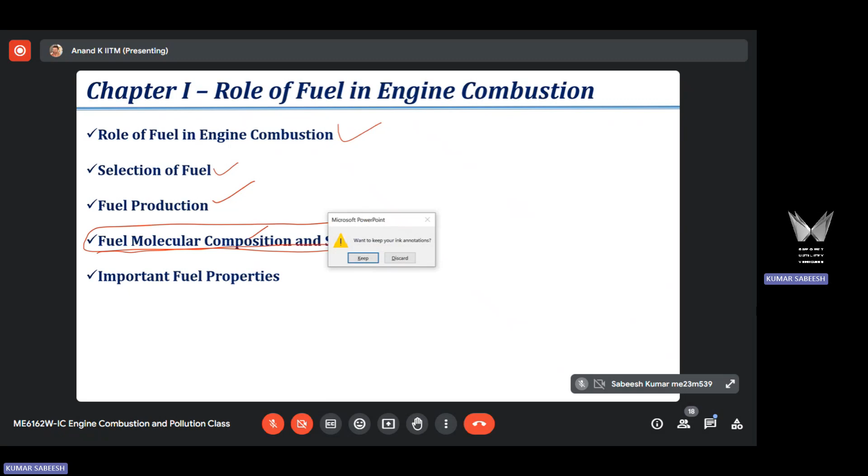So gasoline and diesel are primarily designated as hydrocarbon fuels because the major elements or atoms present in gasoline and diesel composition are carbon and hydrogen. Carbon typically up to 84%. Hydrogen is around 14%. 2% are other trace elements.

Okay, of course, in the current fuel specification, we restrict the sulfur content to a very low value. We call it ultra low sulfur. Sulfur in gasoline is negligible. In diesel, it's relatively high, but nevertheless, we use a very low sulfur content. Apart from that, you may have a little bit of nitrogen and oxygen, right? So those are called trace elements.

So you have some trace elements apart from carbon and hydrogen. Carbon and hydrogen are the major elements present in gasoline and diesel. That's why they are referred to as hydrocarbon fuels. So what we have understood is gasoline and diesel are complex multi-component mixtures of hydrocarbons. Why do I say it's a complex multi-component mixture? Because

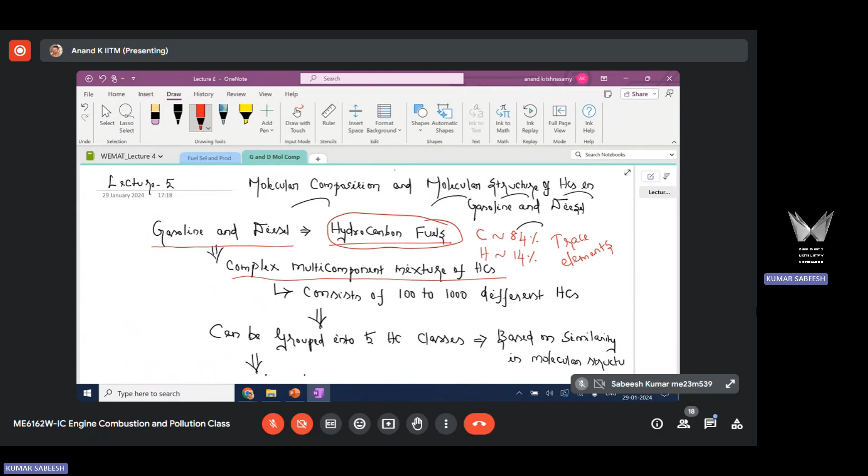from the analytical techniques, in fact, it's not one technique that we can use to identify what is inside gasoline and diesel. We have to use multiple analytical techniques to identify the composition. Although we use these two fuels in our day-to-day life, we never pay attention to their composition, which is very important for understanding the combustion process undergone by these fuels. That's why we are spending time on this.

So as I said, we have to use multiple analytical techniques because the number of hydrocarbons present in gasoline and diesel can vary anywhere between 100 to 1000. You can now imagine the complexity of the fuel. Okay, so why is it given in a range? Why is it not a specific number? What could be the possible reason?

Molecular bond, sir. What is that molecular bond? What I mean to say is like ethanol is there, then C2H5, then benzene can be C6H6 like that. No. My question is not about molecular structure. My question is why it is given in a range. Why is it not a fixed number?

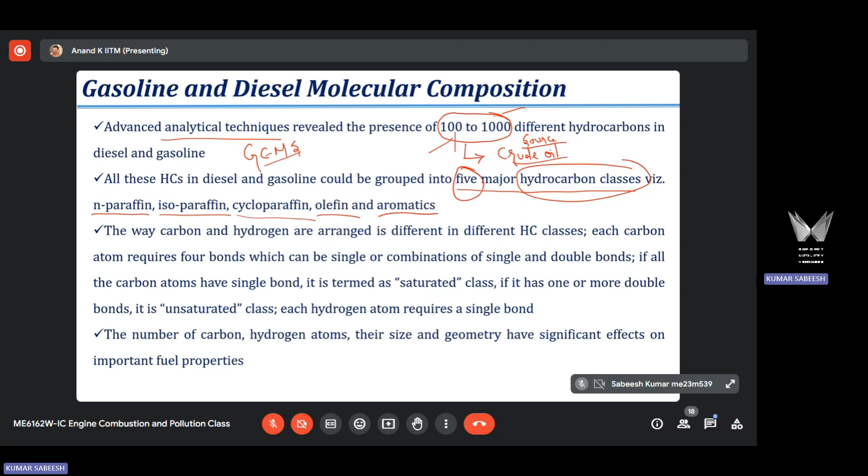What are those 5 hydrocarbon classes? Normal paraffin, isoparaffin, cycloparaffin, olefin, and aromatics. These 5 are called hydrocarbon classes. So you can group these 1000 hydrocarbons into 5 classes as indicated here, and this grouping is done based on similarity in the molecular structure.

This is very fortunate because what I will do is, when I want to simulate the combustion process with gasoline or diesel, I will consider only these 5 classes. I will take 1 or 2 representative hydrocarbons for each class and then carry out the simulation. That is how the combustion simulation is being carried out now.

You may be surprised to know that most of the time we use only 1 hydrocarbon to mimic or capture the characteristics of 1000 hydrocarbons. It is a surprising thing, right? But that is a very simplified assumption. You have to go for more than 1 hydrocarbon, but you have to carefully choose those hydrocarbons, because with those very few hydrocarbons, you have to capture the characteristics of 1000 hydrocarbons. So it is a challenge, right?

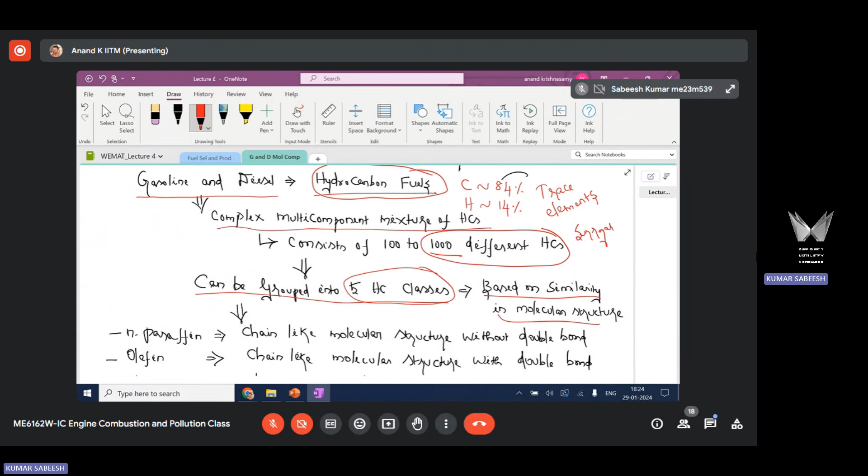How many and what kind of hydrocarbons you choose to carry out your combustion simulation is an area by itself. It's a challenging task. This approach is called the surrogate modeling approach. That is the approach currently used to carry out combustion simulation of SI engines and CI engines with gasoline or diesel. A surrogate is a representative hydrocarbon. We use only very few. The most simplified case is you use only 1 hydrocarbon to capture the characteristics of 1000 hydrocarbons. This is an important point to note down.

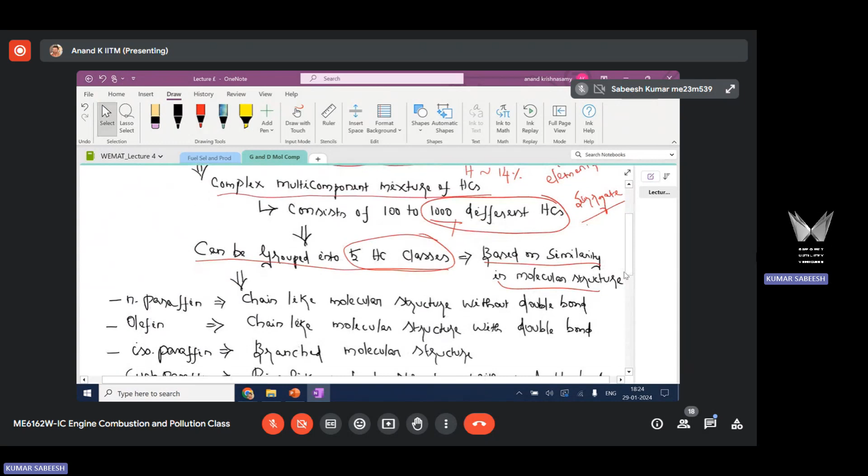As I said, these 1000 are grouped into 5 based on this consideration. They have only 5 different molecular structures. What are they? Normal paraffin, which has a chain-like molecular structure without any double bond. Then you have the olefin class. Again, it is a chain-like structure, but here you have a double bond present in the molecular structure.

You have isoparaffin. In this case, you have a branched molecular structure, not a chain. Then you have cycloparaffin. It is a ring-like molecular structure, without double bond. Then you have aromatics, a ring-like structure with double bond. So all these are hydrocarbons. I will show the typical molecular structure of these 5 classes.

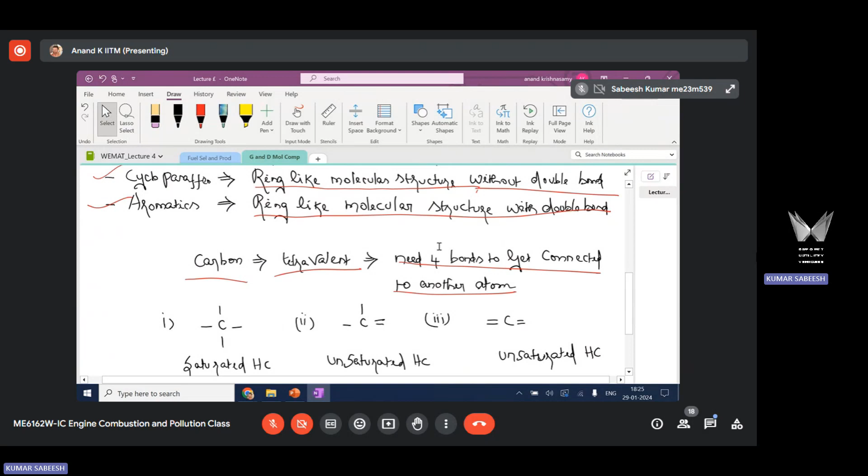But before that, take a note that from the perspective of connecting carbon and hydrogen, carbon is tetravalent, meaning it needs 4 bonds to get connected to another carbon atom or hydrogen atom. I have shown 3 possible cases here. Case 1, all 4 are single bonds. Case 2, you have 2 single bonds and 1 double bond. Case 3, you have 2 double bonds. So tetravalency is satisfied in all 3 cases.

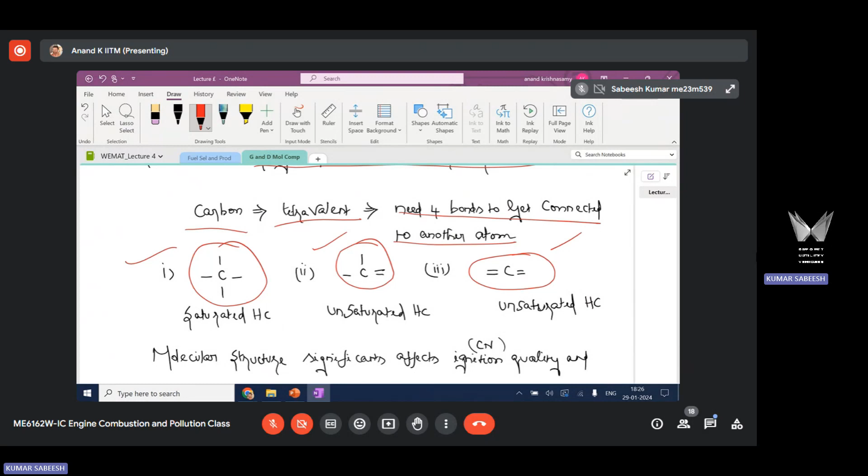But in case 1, you have only single bonds. Case 2, you have a double bond and 2 single bonds. Case 3, you have 2 double bonds. Whenever you have a double bond, it is said to be an unsaturated hydrocarbon. These 2 are unsaturated hydrocarbons. Whenever you have all single bonds, it is said to be a saturated hydrocarbon. This is very important to know. There is a bit of chemistry involved here.

This is important because how carbon and hydrogen are connected in a hydrocarbon fuel carries a lot of significance, because the energy you need to form a radical from a single bond is different from the energy needed for a double bond. Earlier we discussed radical formation. Fuel possesses chemical energy in the form of enthalpy of formation. To initiate SI engine combustion, we discharge an electric spark. The spark discharge provides thermal energy or activation energy to form radicals.

In a diesel engine, you are compressing air to a high pressure and later injecting fuel. This compressed air provides activation energy to break the fuel molecule and form radicals. Once the radicals are formed, the combustion event gets started. And I already told you that combustion is a self-sustaining event. It will go on its own as long as sufficient radicals are available. You just have to initiate it.

To start the combustion event, you provide spark discharge in an SI engine. In a diesel engine, you compress to high pressure and high temperature. This helps initiate radical formation. Once the radicals are formed, the reaction goes on its own. As long as sufficient radicals are available, the combustion event will continue and thermal energy release will continue to happen.

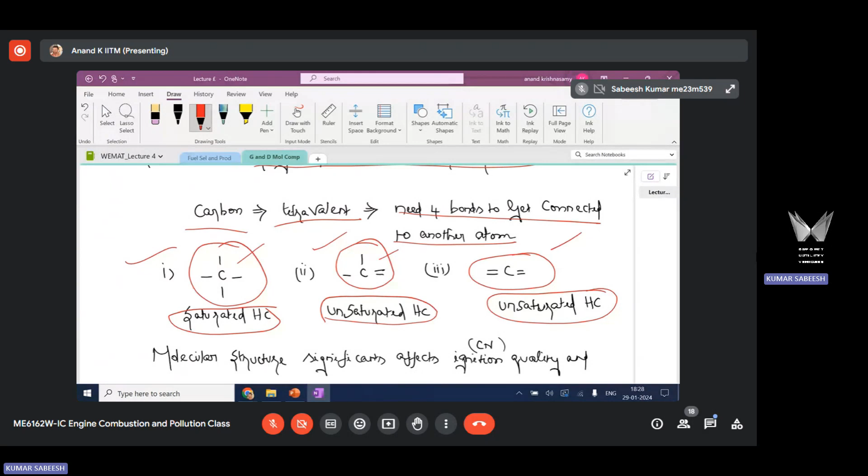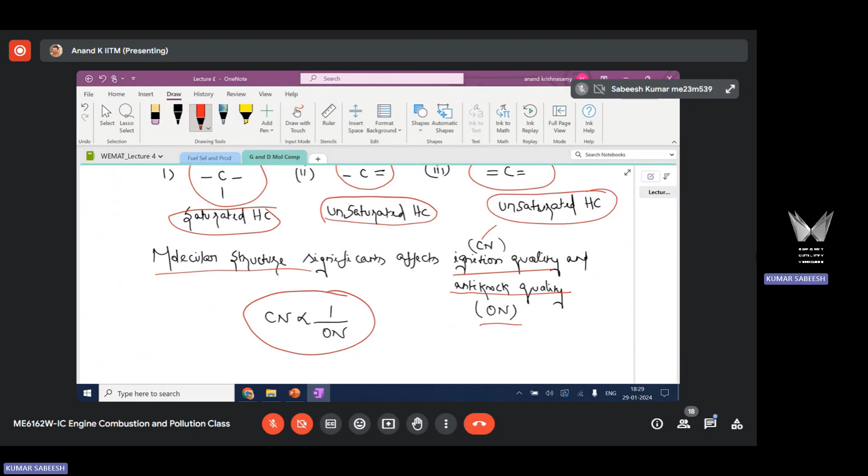Okay, so molecular structure shows how the carbon and hydrogen are connected. It will have a significant effect on ignition quality of the fuel, which is measured in terms of cetane number. It is going to significantly affect antiknock quality, measured in terms of octane number of gasoline. Cetane number is required for diesel. We have already seen that these 2 are inversely proportional. The way the carbon and hydrogen are connected is going to be affecting the ignition quality and antiknock quality.

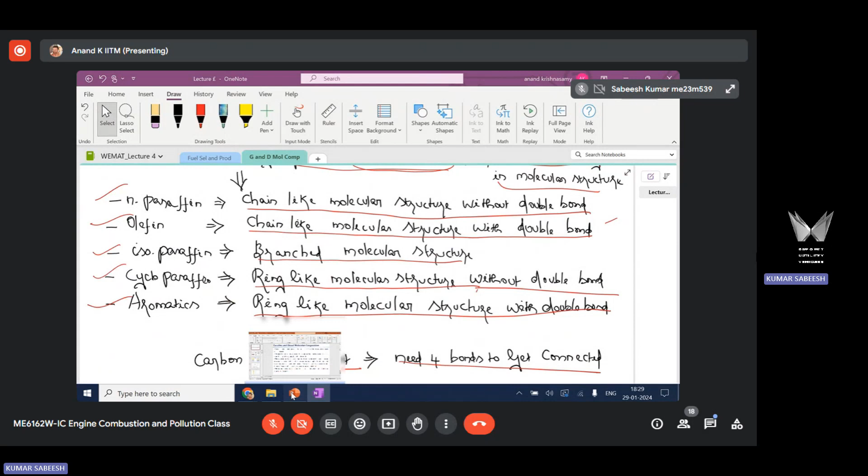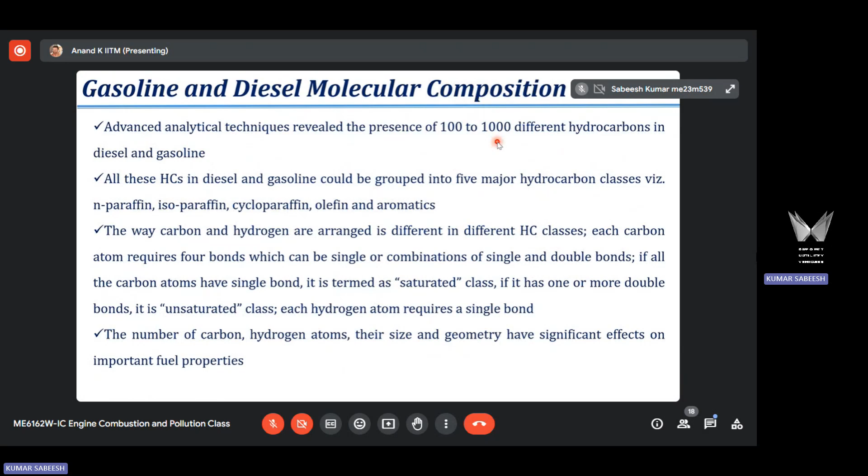Now with this background information, I will show the schematic of these 5 different hydrocarbon classes. So these 5 are the hydrocarbon classes, right? So we have this 1000 hydrocarbons in gasoline and diesel, and they can be grouped into these 5 classes. You have only these 5 different molecular structures in the case of hydrocarbons present in gasoline and diesel. So the first one is normal paraffin. You could see that it is a chain-like structure. Carbon and hydrogen are connected with a chain-like structure. This is without any double bond. So it is a saturated hydrocarbon.

Now you look at the olefin hydrocarbon class. Again, same chain-like structure. But what is the difference you are noticing here? It has a double bond. Okay, here all are single bonds. With carbon, you have all 4 single bonds. As I said, 4 bonds, all the 4 are single. Now you look at this carbon. In this carbon, you have a double bond and 2 single bonds. So even if 1 double bond is present, it's said to be unsaturated.

This is isoparaffin class. You have a branched structure. It's not chain, rather it's a branched structure. To the second carbon atom, there are 2 methyl groups attached. CH3 is methyl group. So you could see one CH3 group here, another CH3 group here. Two CH3 groups are attached to the second carbon atom. To the fourth carbon atom, one more CH3 group, methyl group, is attached. So you have branching because of attaching the CH3 group to the base structure. This is the base structure. Then you have branching because of fixing the CH3 or methyl group to the second and fourth carbon atom.

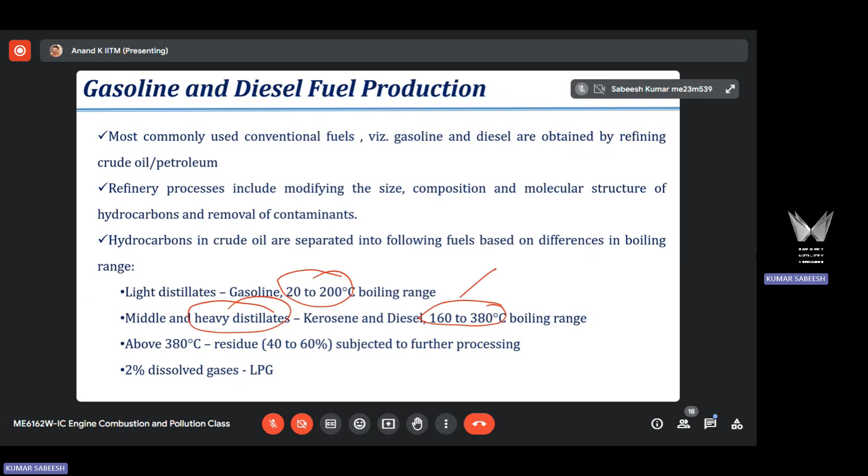Can someone tell me, is it not a problem in a diesel engine or CI engine when you use diesel with such a low volatility or high boiling range? Boiling range we have already discussed previously. It is from 160 to 380. For gasoline, it is 20 to 200 degrees Celsius. So this is a heavy distillate, right? Heavy hydrocarbons present in diesel increase the boiling temperature, 160 to 380.

Now, does it affect CI engine performance? It's because it resists vaporization, right? In a diesel engine also, when you introduce fuel, it's going to resist vaporization because of its low volatility. Does it cause any problem in a CI engine? But in the CI engine, the fuel is injected only in the compression stroke. So already the temperature and pressure will be higher. Exactly, that's the reason. This is a perfect reason.

So you inject fuel at high pressure, and when do you inject? Here you are injecting fuel in the port during intake stroke. In a diesel engine, CI engine, you inject fuel during the later part of the compression stroke. And you inject fuel at a very high pressure, anywhere between 300 bar to 3000 bar. I already discussed this when we discussed fuel effect in the first part of this course. Very high pressure helps in quicker atomization.

Inside the cylinder, you have air at high pressure and high temperature because compression ratio is high. So although the fuel has a low volatility, it doesn't matter in a CI engine because you are injecting fuel at high pressure, and at the time of fuel injection you have high pressure, high temperature air inside the cylinder. So you have favorable external conditions in a diesel engine to vaporize the fuel, although you have a low volatile fuel which resists vaporization. Resist means it will delay the vaporization event, but your conditions are favorable to quickly vaporize.

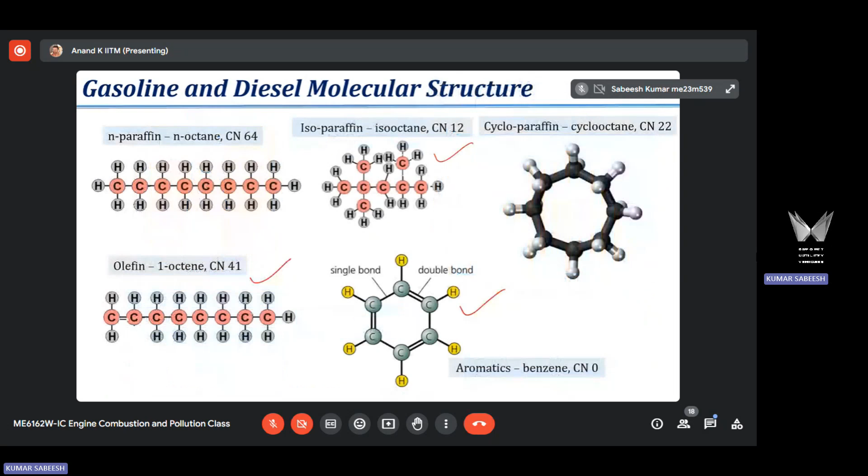In European diesel fuel, the aromatic content is only 1.8%. Whereas in American diesel fuel, the aromatic content is very high, 32.4%. And we already know that aromatics have poor ignition quality, right? This is what we discussed here. So what will happen to the cetane number? The overall number will be less. It's not only aromatics, you have paraffin also. Here paraffin refers to normal paraffin, isoparaffin and cycloparaffin, all put together. Out of this, normal paraffin is the major component present.

US diesel has a cetane number of around 40. European diesel has a cetane number of around 55. You see a large difference in the cetane number of diesel in different parts of the world. European diesel has a very high cetane number because it has a very low aromatic content. US diesel has a very low cetane; 40 is the lower limit according to the fuel specification. It is very low because it has a very high aromatic content.

So I have done interesting work for Ford Motors, Detroit. Detroit is the automotive hub. Ford wanted to see whether their engine can accommodate diesel with such a significant variation in cetane number. So I've done some work for them and given suggestions on how to optimize engine conditions, because the fuel used has significantly different ignition quality. In one case it is 55, in the other case it is around 40.

But the takeaway for you is, in diesel, the normal paraffin content should be increased, because you need fuel with high reactivity. This is one of the fundamental requirements for CI engine application. Otherwise, the fuel won't ignite. It may lead to knocking combustion. You need high reactivity fuel. Volatility doesn't matter because you are introducing fuel under favorable conditions that help in vaporizing the fuel.